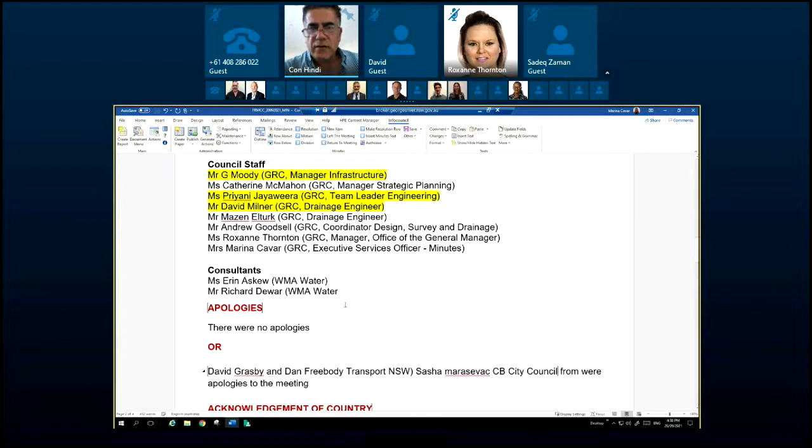Mr. David Milner? Yes, I'm present, and sorry, there was a late apology from Mr. Sasha Marasevac from Canterbury Council. Oh, Canterbury Council. It's not on that list, is it? Okay, we'll also accept that apology as well. Then we'll go to Mr. Mazen Elturk. Yes, I'm present here. Good, thank you. Mr. Andrew Goodsell. Yes, I'm present. Roxanne Thornton is present. Ms. Marina Cavar? She is present, Mr. Chair. She's taking the minutes today. Okay, good. Consultants, Ms. Erin Askew.

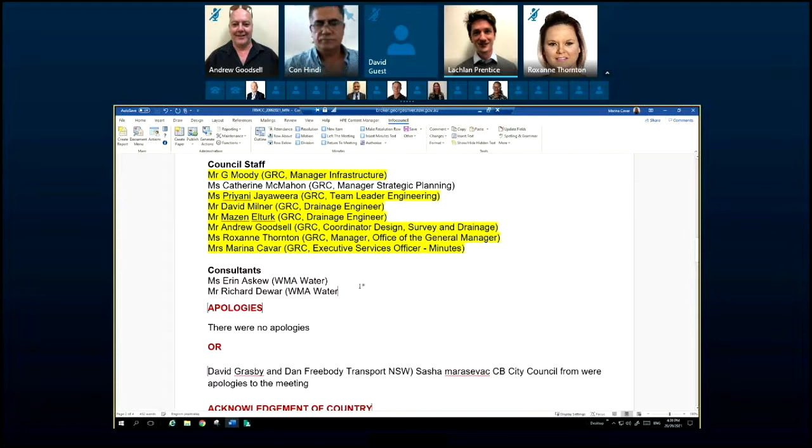I will mention too. Can everyone hear me? Yep. Hello, this is Mr. Lachlan Prentice, Senior Environment Officer, GRC staff. I'm also present. Okay. All right. Well, Erin is present, and Erin, we've just unmuted you.

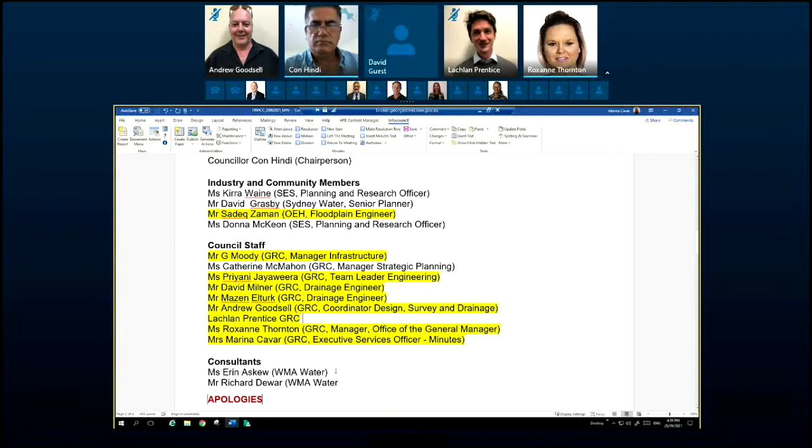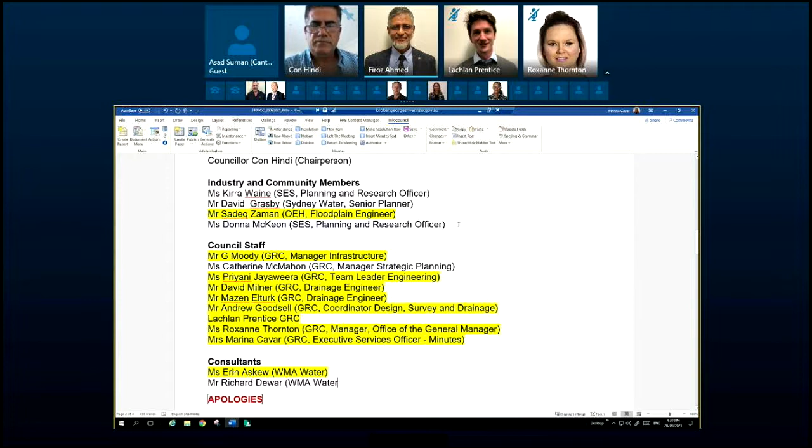Excuse me, Mr. Councillor. Yep. So this is Asad Suman from Canterbury Bankstown Council is also present. Good, thank you. Mr. Councillor, this is Firoz Ahmed, Senior Development Engineer from the Georges River Council. I'm also present. Thank you. And Beth Salt from Georges River Keeper is also present. Sorry, I was having audio issues before. Thank you. Can we have those names added if they're not there already?

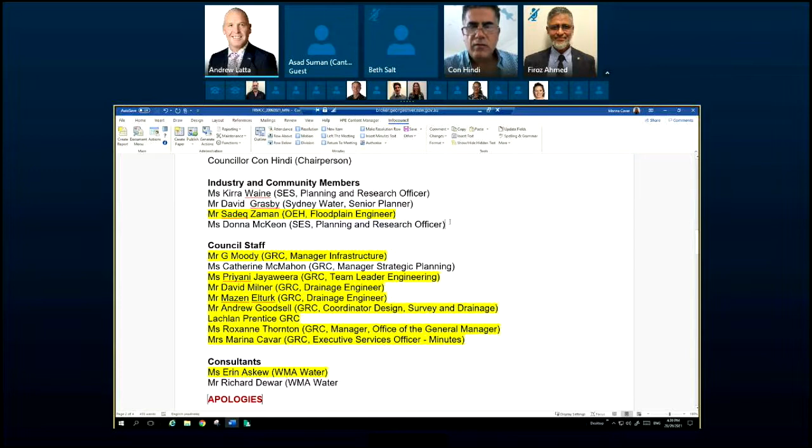And Councillor Hindi, Andrew Latta, Director of Assets and Infrastructure, is also present. Welcome, Andrew. Thank you. Okay. Do we have anybody? I note that we have a Peter Cinque. Okay. Pulak Saha. Where's that from? I'm not sure. Peter, are you able to say where you're from? New South Wales State Emergency Service. Thank you, Peter. Pulak Saha. I'm from Bayside Council. From Bayside, thank you, Pulak.

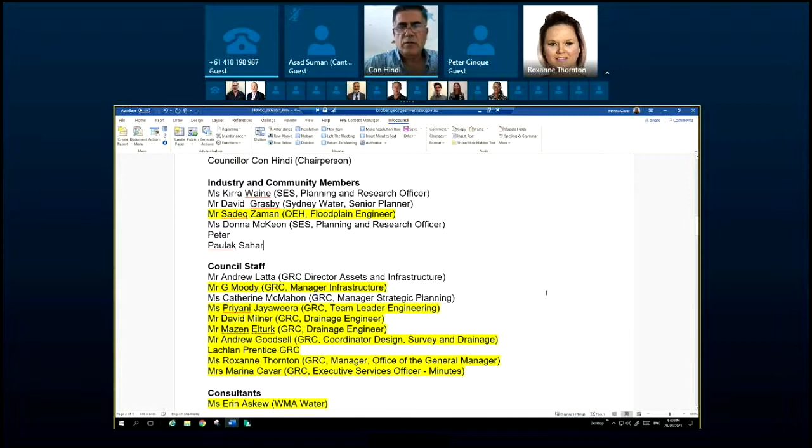Thank you. Richard Dewar, have we already said your name, Richard? Apologies. No. Richard Dewar, if you're able just to unmute yourself and let us know where you're from for today, just for the minutes. Yeah, I'm here. Thank you, Richard. And where are you from? WMA Water. WMA, thank you. Sarath Danton. Sarath, are you there? If we could just mark it down, minute taker, that there is a Sarath Danton also present, and we may just investigate as to where Sarath is from. Thank you.

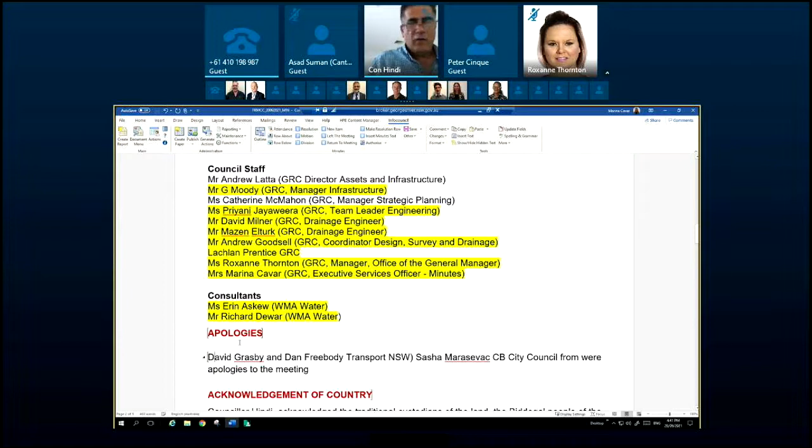Anybody else? Look, as people come along, we can add the names. I probably need Roxanne's help a bit when it comes to the moving and seconding to make sure that we get it right. But apart from that, welcome everyone to the meeting, and anybody else that joins us can unmute themselves and let us know. So we've discussed the apologies. We've got 3 apologies. We're now looking for a mover and a seconder, since we've got all the names. Who would like to move and would like to second?

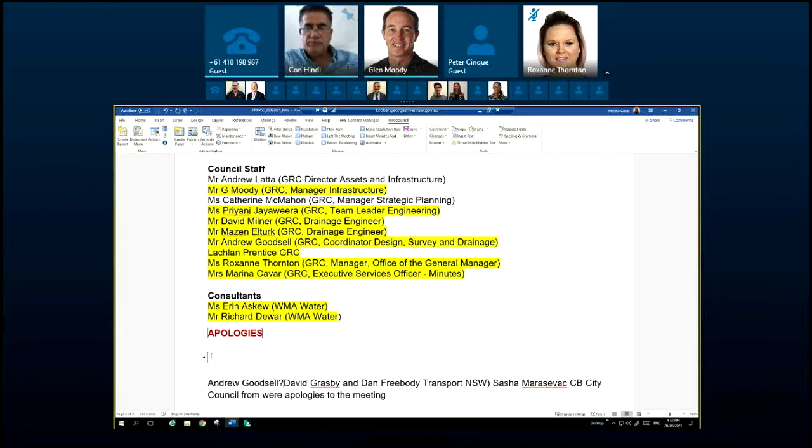Just for clarification there, Councillor Hindi. Yep. So for voting purposes under the terms of reference, the mover or seconder should be from yourself as the chair, the SES, which we've got Peter online, Office of Environment and Heritage, which we've got Sadeq online, or the community representative, which I believe is Aaron Sellers, but I'm not sure that we've confirmed that he's online. So you need a mover or a seconder from those groups. All right. I'm happy to move it. I'll move the apology, and we'll have Peter or Sadek to second.

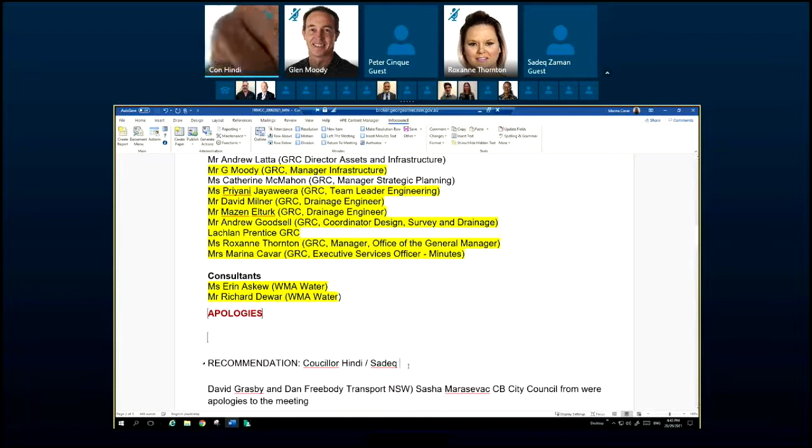Can't hear anyone. Yeah, I'm here, Councillor Hindi. Is that Sadeq? Yes, Sadeq Zaman. Okay, thank you. Moved by myself, seconded by Sadeq Zaman. All in favour, say aye. Against, declare that carried. Does anyone have any conflict of interest so we can have it recorded? Probably don't, but the only thing about conflict of interest here is some people live in that area where we're talking about the floodplain risk management, and some of them don't know whether their property is going to be impacted or not. But at this stage, we're saying no one's got a conflict.

All right, there are no speakers registered to speak at the meeting. Now we move on to confirmation of the previous minutes of the Floodplain Risk Management Committee meeting held on the 2nd of November 2020. Can I have a mover to move the adoption of the minutes, please? I'll move the adoption, but I wasn't at the meeting. Do we have a seconder? Yeah, I can second. I was in the meeting, Sadeq Zaman. Okay, that's good. So moved by Councillor Hindi, seconded by Sadeq Zaman.

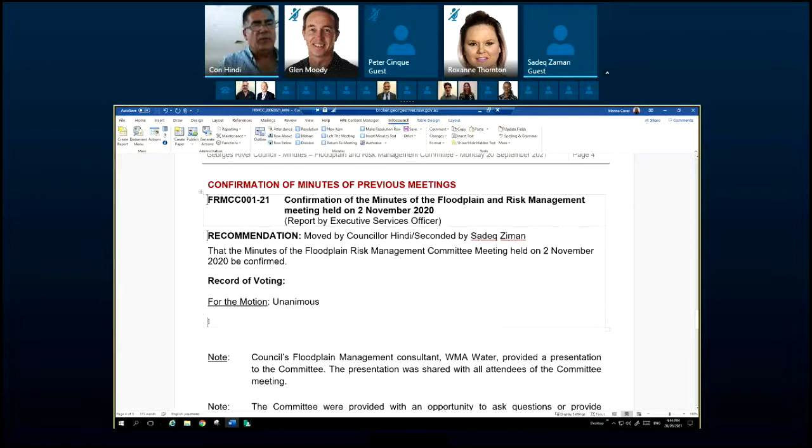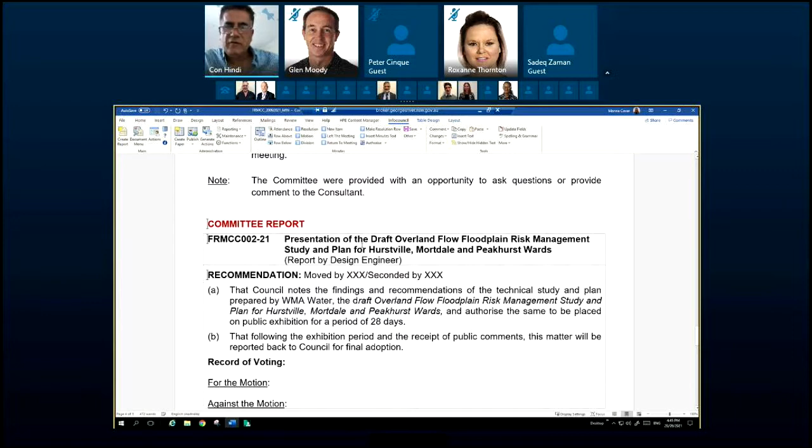Is there any discussion, omission, or alterations? If there's none, all in favour, say aye. Against, declare that carried. Let's move on to the only item on the agenda, FRMCC002-21, presentation of the draft Overland Flow floodplain risk management study and plan for Hurstville, Mortdale and Peakhurst. Who's the speaker on that one today? David Milner, who's presenting? That will be Erin Askew from WMA. Okay, good. So can I hand it over to Erin Askew to start the presentation?

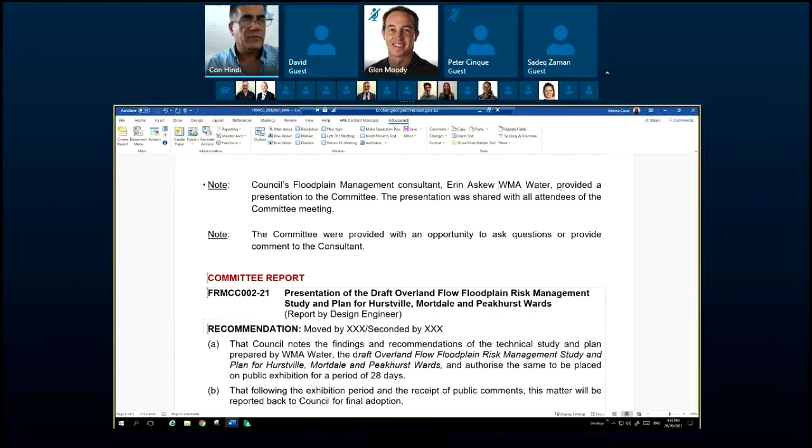Aaron? I'm just flicking back to our agenda, which is the main one. Let's see the presentation. Hello, Roxanne, do we have Aaron there? I believe so. Let me just see if I can manually unmute. Is it Erin Sellers that we're wanting to unmute, Councillor Hindi? No, I thought Erin Askew. Erin Askew, thank you. I've just unmuted Erin Askew. Aaron, are you there? He's on mobile. Okay, we've got one mobile that seems to be unmuted. Someone's just advised that Erin Askew is on mobile.

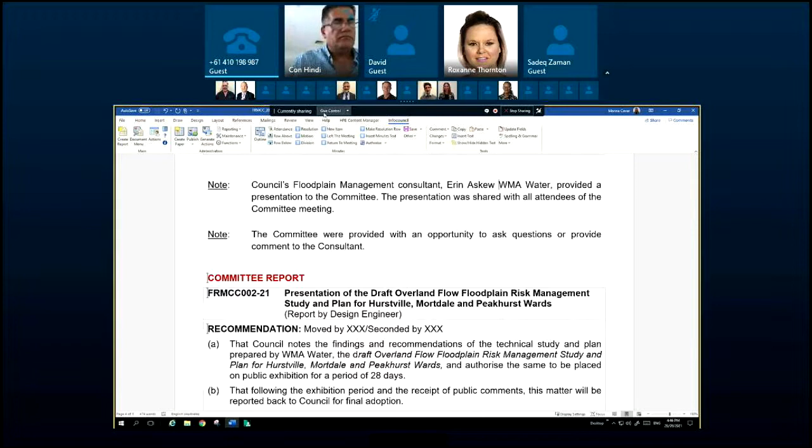Hello, are you able to hear me now? We can, yes, thank you. Okay, wonderful. I'll also need to share my screen. It currently says that screen sharing is disabled. And do you need that being shared from your mobile connection or from the one that actually has your name? From the one that has my name. No worry, that's easy to do. I'll just make you a presenter now. Okay, thanks. And Aaron, that should allow you to share now. Okay, wonderful. Thank you, Aaron. Over to you, and thank you, Roxanne, for your help there. Is that working for you, Aaron? Yeah, I'm just trying to select the program. Oh, no worries at all. Okay, are you able to see that, everybody? Yes, thank you. Wonderful.

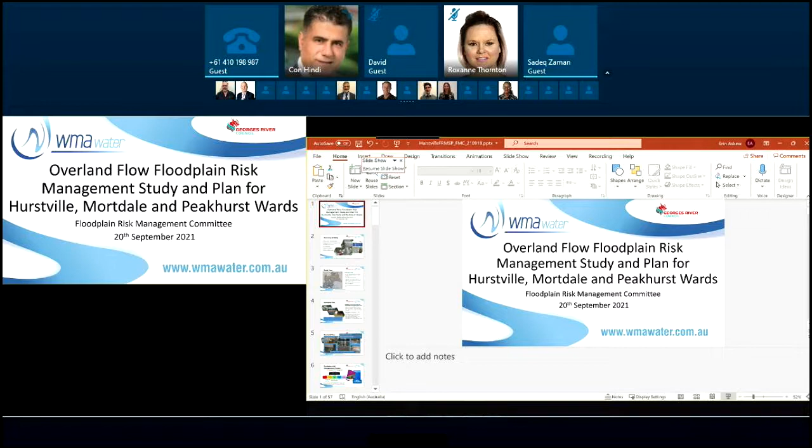Okay. So today we're just going to talk through the Overland Flow floodplain risk management study for the Hurstville, Mortdale and Peakhurst wards. So these sections of the LGA were part of the former Hurstville LGA, and the flood study for those areas was done a few years ago, and so this management study is just following on from those. It makes for quite a long title, but anyway.

So today I'm just going to give a bit of a recap of Overland Flow and what we mean by Overland Flow, a background to the floodplain risk management process, our approach to the study and the recommendations that are coming out of the study, and where to from here. As I just mentioned, it's the Hurstville, Mortdale and Peakhurst wards of the Georges River LGA, but these were part of the former Hurstville local government area. And so as part of this study, we're looking at what's called overland flow. Now, overland flow is generally when the rain falls on the catchment and runs off to the natural or constructed drainage systems. So it's distinctly different from Georges River flooding, for example.

Overland flow is typically a very shallow depth. And there doesn't tend to be great scale in the types of events. So when we talk about a 5% annual exceedance probability compared to a 1% annual exceedance probability, the scale between those is not significant. So typically, the flooding sort of scales over about 0.5 metre, whereas if we were talking about Georges River flooding, the scale between those events would be metres. And that's just a function of the type of flood behaviour it is. But what this means is that areas that are inundated, not a whole lot of extra areas come in as we get through larger events.

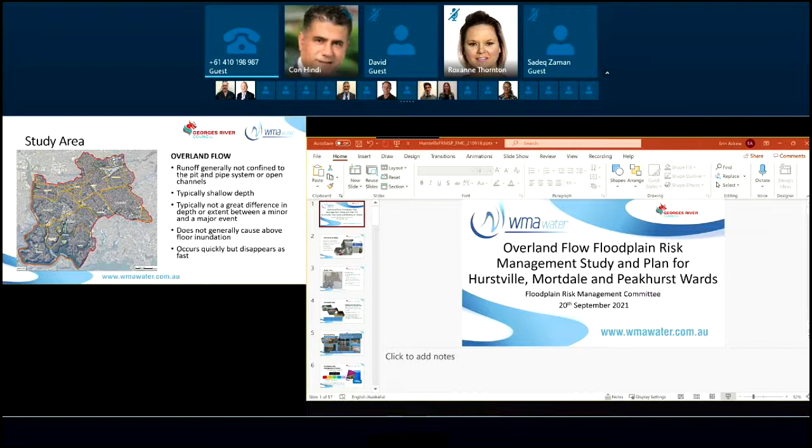Some challenges that we have when we talk about overland flow, because it's really this small scale inundation resulting from a rainfall event, we have challenges with the community often that the term flood means different things to different people. So when I talk about a flood, lots of people think I'm talking about the Georges River flooding, but instead we're talking about these very localised events. Communities often have not a lot of tolerance for flow not fitting in pipes.

And so the stormwater network typically is designed for about a 5-year flood event, which is a very small flood event compared to that 1% AEP, which is a 100-year flood event. So it's a very challenging type of flooding to communicate with the community, because the community often expects there to be no water anywhere anytime it rains. But that tends not to be the case, because, like I just mentioned, the stormwater system, nowhere in Sydney or Australia, for that matter, would have a capacity larger than about a 5-year.

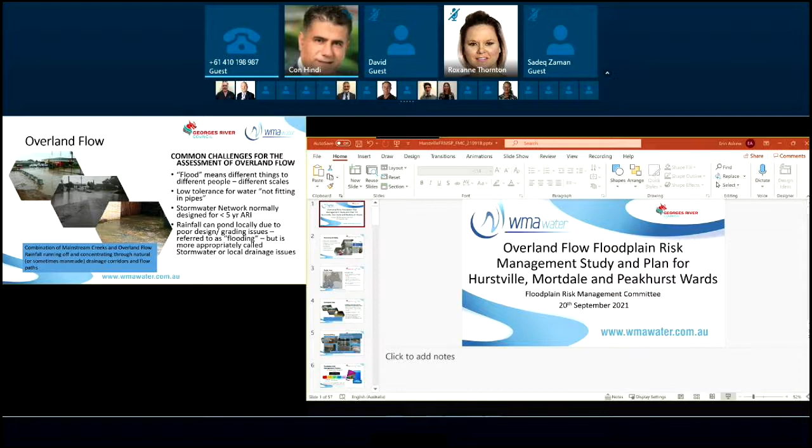So some of the recommendations don't necessarily provide a solution to that as part of this report, but provide a pathway forward for council to do a little bit more localised investigation at those places. I just wanted to cover that off because sometimes it's...

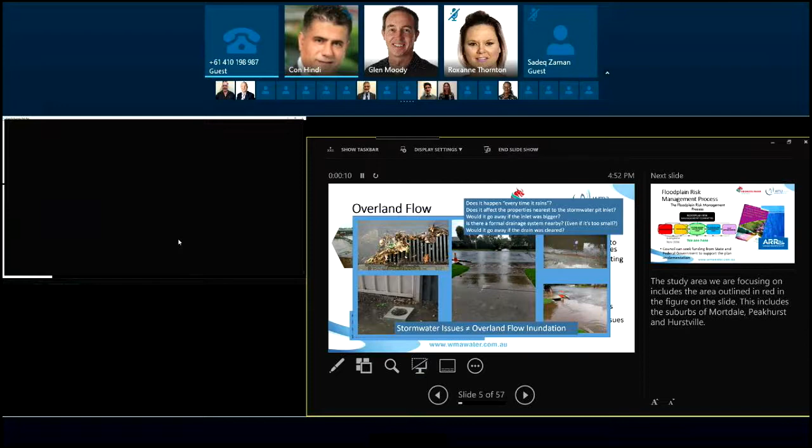Glen Moody. Hey, Glen. Hi, Erin. Sorry, we're getting some comments through. We're just having some difficulties viewing the presentation. It's appearing twice on the screen. If you could just try and maximise the presentation image. Okay. So on my screen, it's the full screen. Let me just try and share something else. Is that a full screen now? That is better now. It's better, but it's showing the next slide. Oh, okay. So it is slightly better. Sorry, this is IT. Are you running it on 2 screens or just on 1 screen? Yeah, I've got 2 screens. Try and see if you can share the screen that's actually showing the slide presentation.

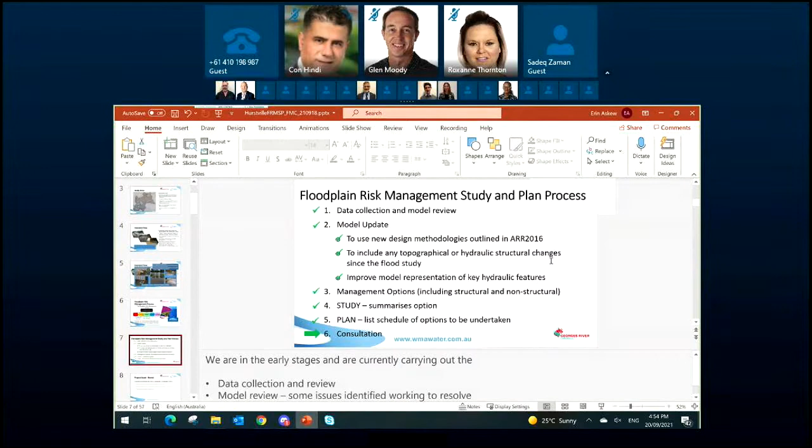So when I go share screen, there's no option. How do I change the option? Is the presentation being shown on your primary desktop or on your secondary screen? Hang on, just a second, I'll move it. Sorry, how do I make it share not my primary screen? I think the best thing you can do is just increase the size of your slide that's on the screen right now, rather than trying to go full screen. Okay, just the presentation. Yeah, just make it larger so that people can see it better. Okay.

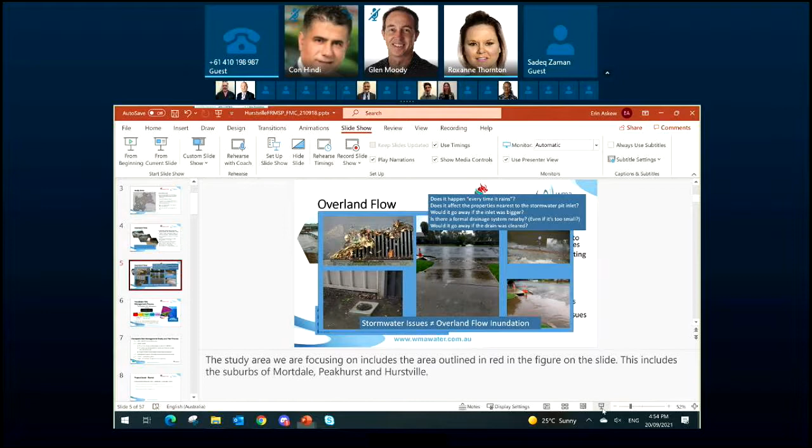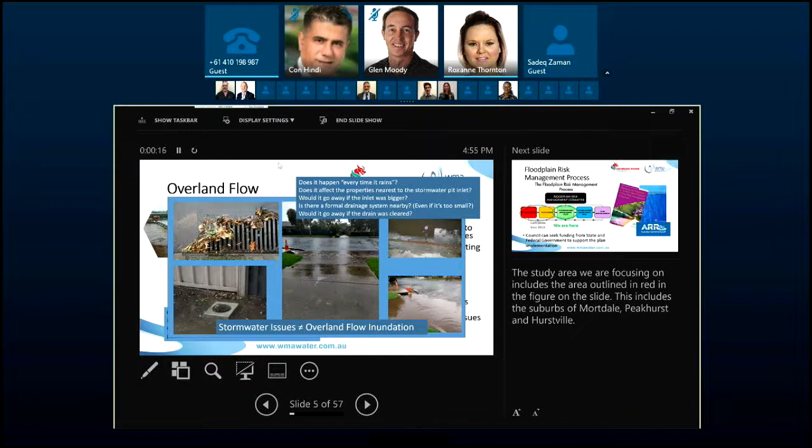Erin, if you see on the bottom side of your presentation, there's a full mode. Maybe if you click that one. Yeah, so that's what I'm running, but that's not on my primary screen, and so I don't know how to share the non-primary screen. This is Roxanne speaking. Hi, Erin. I'm just going to try something else. If you can go to that screen there, and then see the grey options under, there's that one. Up the top, see display settings? Yeah. Okay, and then try swap. There, can you see it now? Yes, we can. Okay, wonderful. We're away. Thank you.

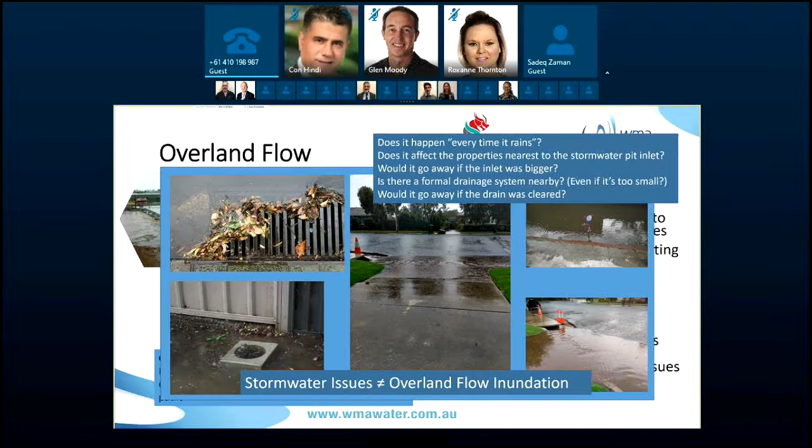Excellent. Okay, so the next thing I wanted to run through was just a quick overview of the floodplain risk management process. So this is stipulated as part of the New South Wales government's flood-prone land policy. And there are a few documents that support that process, which is the New South Wales Floodplain Development Manual. And there are also some things in the Australian Disaster Resilience Handbook Collection, Handbook 7, that the New South Wales Department of Planning, Industry and Environment have drawn into the New South Wales Floodplain Risk Management process.

And essentially what this means is there's a framework which councils move through, and it allows for the assessment of flood behaviour in addition to the identification of mitigation options. And the really key aspect of it is that the council is able to access funding throughout the whole process. So including the technical investigations that are done, but most importantly through the concept design and implementation of the recommendations out of the plan.

So a number of the options that are recommended out of this floodplain risk management study, council will be able to seek grant funding from the state to help to implement those. And so we're right in the middle there. It's really the green and blue stages that we're currently doing, and the recommendations will be that final purple stage.

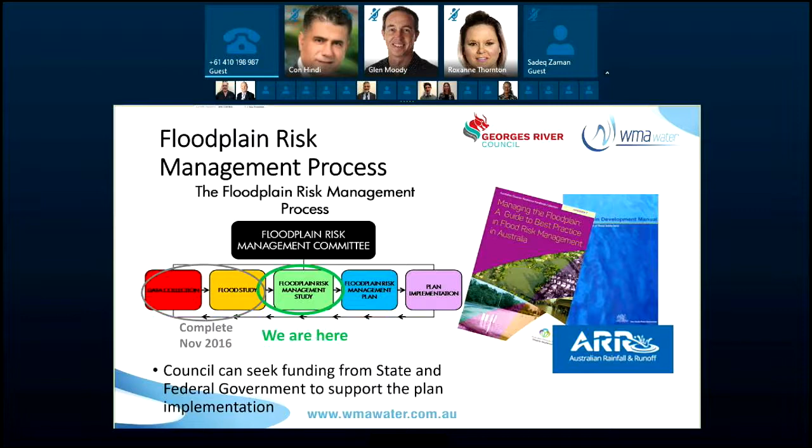And so while we're undertaking the study under that framework, these are the key steps that we've done. So there was a data collection and model review. Like I mentioned, the flood study was done a few years ago, I think it was 2016. And so there's been some changes to the catchment, as well as some significant changes to the methodologies that we apply. We refer to it as AR&R 2016 or AR&R 2019; there was an update to it done in 2019. And so those methodologies have been applied to the representation of flood behaviour in this catchment.

And that really future-proofs the flood behaviour representation that council uses, at least for the foreseeable future. The last significant update of AR&R was done in 1987, so it's been a long time since an update was done. And so we've updated the modelling and re-established the design flood behaviour. And then through a process with council staff and engagement with the community, we've identified a series of hotspot locations where there's flooding issues, and identified strategies that could be applied at those locations to help mitigate the flood risk.

And so the study, which is the document that everybody's had access to as part of the agenda for this meeting, really outlines the assessment that we've done. And there's a table in there which we call the plan, and that is the recommendations. And the next stage is consultation, but I'll talk about that at the end of my presentation.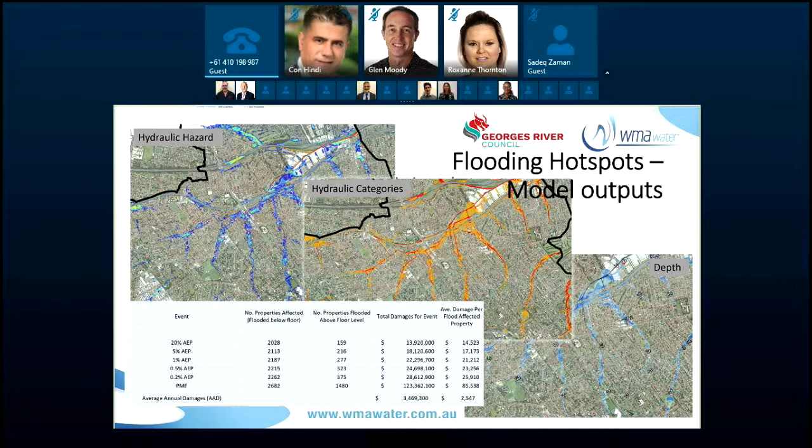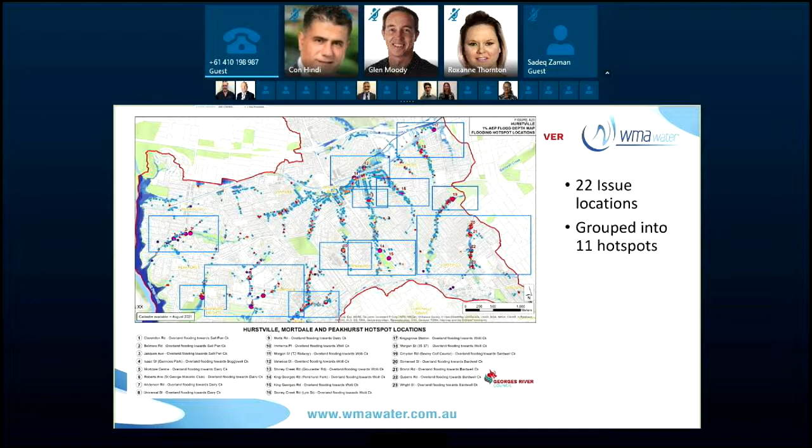So for this study area, there was 22 locations that were identified as having a flooding issue. So this might have been something that's reported or we identified as part of the study. And we grouped those into 11 hotspots, because what we found was they were sort of all along the same system, so they really were part of the same location. So any strategy that we can implement there really needs to be an overall strategy that works for that entire section of the system. So our next step was to identify and assess flood risk management options.

These tend to fall into 3 different categories: flood modification measures, response modification measures, and property modification measures. The first lot that I'm going to talk about are the flood modification measures. And so these are structural works that we can put into the floodplain that physically alter the flood behaviour. These are the ones that we can use the hydraulic model to test. And I've just got a bit of an overview here, because we don't just look at how they impact on flood behaviour.

We also have to consider what's the benefits that we get for the cost, so their economic merit, and how hard they are to implement. Is there the ability for council to stage some of these to help spread the cost over a few financial years? We also look at impacts on the social elements. So do these options make the situation for emergency services better? Do they improve access? Do they impact or improve the flood behaviour for vulnerable facilities? Hazard awareness, disruptions, and support through the community is something that we'll get from our consultation stage. We also look at environmental, which just looks at flora and fauna and heritage impacts.

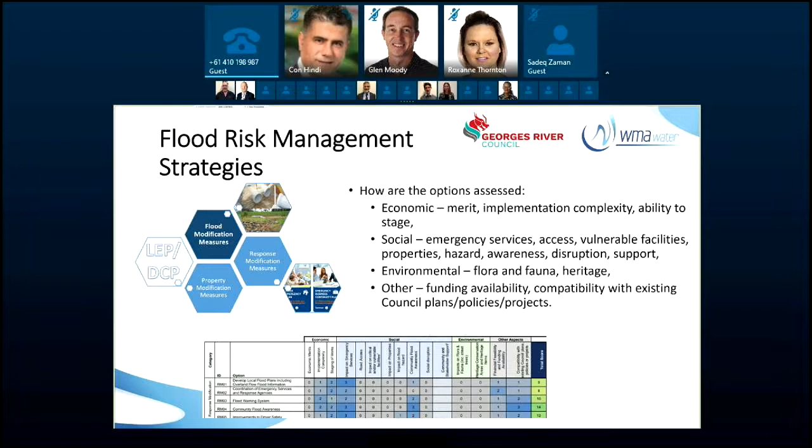Okay, so in total, we assessed 14 separate structural options, and so they included a number of elements. Through our assessment process and discussion with council, we found that 9 of those were really quite viable and have some related recommendation as part of this floodplain risk management study. But there were 5 that we found really didn't work, and so we've discounted those. I'll just run through those ones that we've discounted quite quickly so that the committee can see what we've looked at and why it didn't work. And then I'll run through the ones that are recommended.

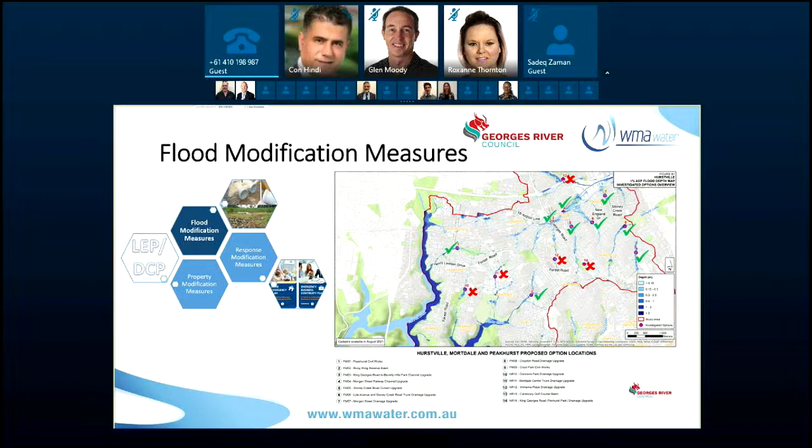So one of the ones that we found didn't really work was the Gannons Park trunk drainage upgrade. So for this one, we noticed further up in the system there were some constraints on the drainage system. So we wondered whether if we substantially increase the capacity of the system through Gannons Park, because obviously it's not under dwellings or anything like that, so it's quite easily accessible, whether we could get improvements through the system further up. What we found is that it really had a localized benefit. So it didn't achieve the outcome that we were trying to get from it, and so therefore this option was discounted.

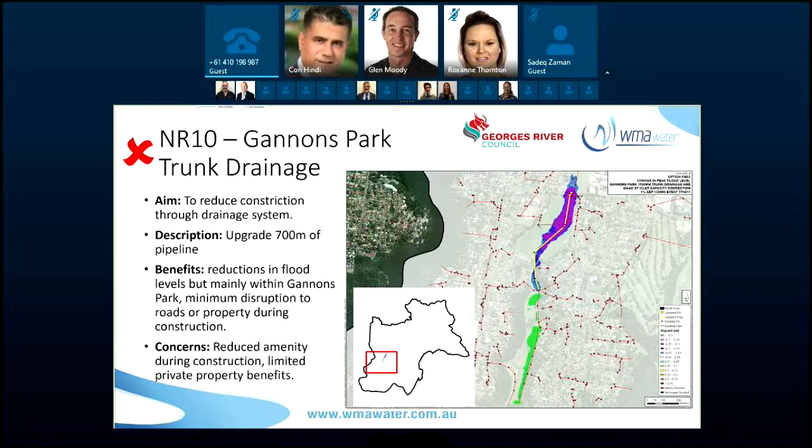In a similar vein, we looked at what we referred to as the Mortdale trunk drainage upgrade. This was to try and reduce the impacts through that Mortdale industrial area. In a similar way, it really had a localized impact, and it wasn't significant enough for it to be made a recommendation. It's only reducing flood levels by about 50 millimetres. So for the cost and the inconvenience of having to upgrade this system, it doesn't have a broad enough benefit to be justified.

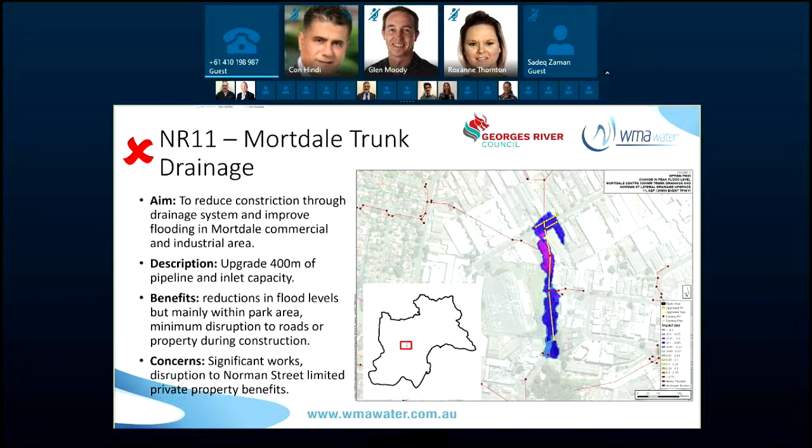The next one we had a look at was called Immarna Place local drainage. We noticed here that the water really wasn't getting into the open drainage channel, so we looked at trying to increase the culvert capacity and the inlet capacity to get that water off the roadway. Again, we found that the works that we modelled just weren't able to remove that water. So again, this one was discounted.

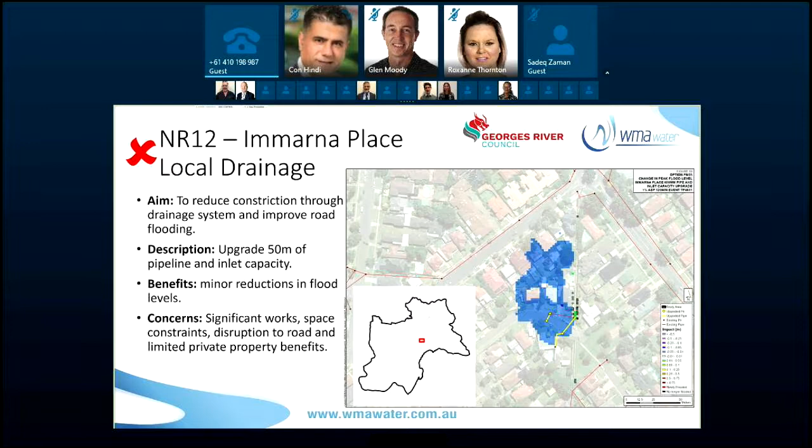The next one was looking at an opportunity in the adjacent local government area, so in the Canterbury Golf Course. A detention basin temporarily stores water, allows the peak of the flood to pass through the rest of the system, and then allows the water to be released slower. We wondered whether one in the Canterbury Golf Course would be an opportunity to help improve the flood behaviour. What we found is that the benefits were really quite localised. What we wanted to see was really some benefits through this system, passing under Beverly Hills train station there. We weren't able to see that with this basin. So again, this one was discounted.

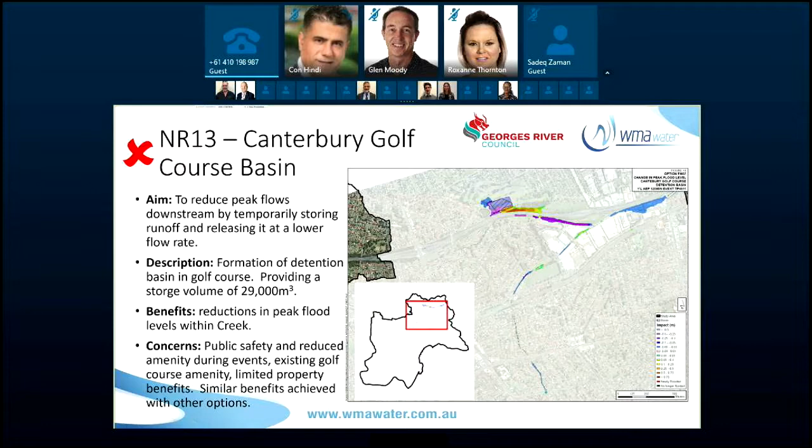The next one that we looked at was a drainage upgrade along King George's Road. Again, it was found to be quite ineffective for the surrounding catchment areas. So again, discounted. So that's been some really negative news. Now I'll move on to the options that are recommended. There's quite a few here which are quite good and have been recommended for future works or assessments.

So the Peakhurst Park detention basin is the first one. This one actually really benefits the entire system, so downstream of Peakhurst Park, down through Clarendon Road, right down through the system. I believe in this one the benefits occur all the way down to Henry Lawson Drive. Like the basin I just described before, this basin would temporarily store the water, allowing the rest of the system some space. Additionally, Hedley Street, just adjacent, has some flooding. By installing a small bund, it helps to keep the flooding off that road as well.

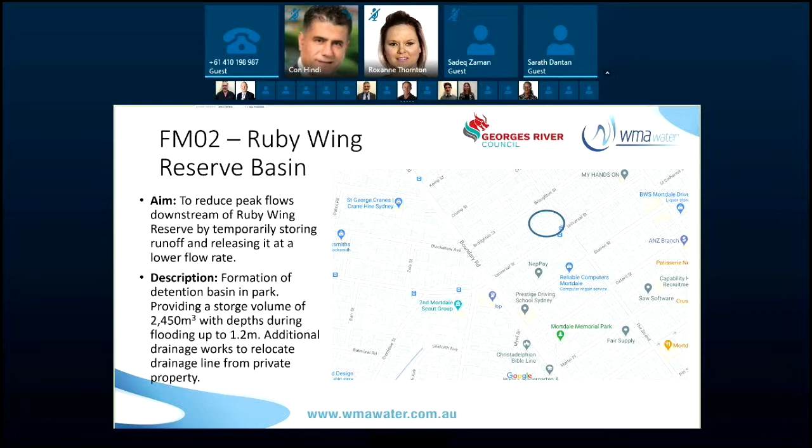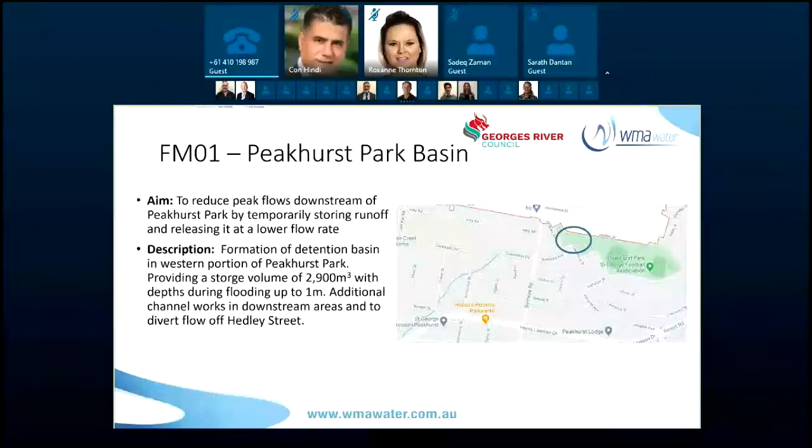Oh, sorry, something I should mention, but just back on Peakhurst Park, the recommendation is to undertake a feasibility study and develop a concept design. One of the requirements of the Department of Planning, Industry and Environment is if the capital works expenditure for a project is greater than $500,000, the option needs to go through a feasibility and concept design study. So that's what the recommendation is out of this study, but that's something that council can still seek funding to support that investigation, and it just moves it further along towards the ability to be able to construct.

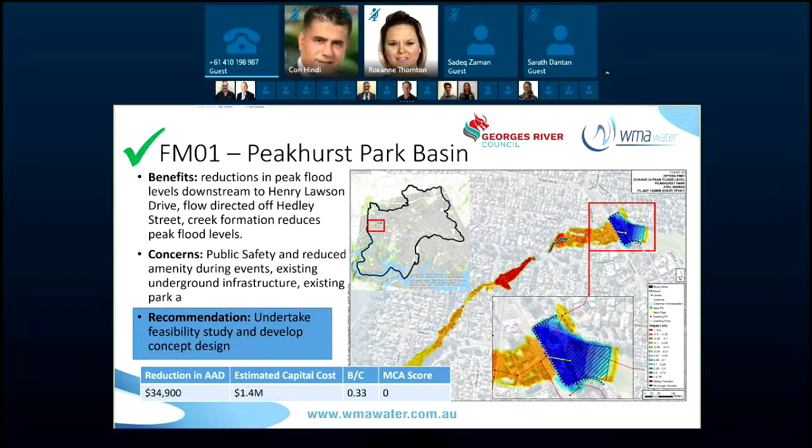And so the recommendation is the same for this Ruby Wing detention basin, because the estimated cost is around $2.5 million, and so we get a slightly lower BC, but the multi-criteria score is slightly higher. So as you can see, that multi-criteria score is really not just about the flooding benefits and the cost. It includes a range of issues.

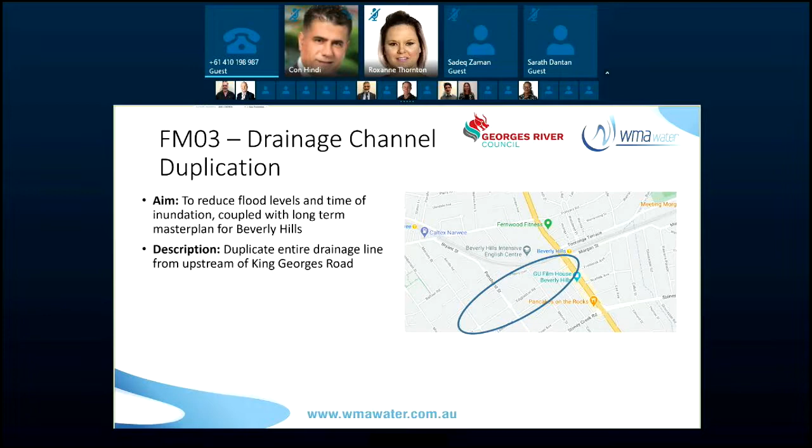So the next one is what we've called the drainage channel duplication. So this really extends right through the Beverly Hills area. There's an open drainage line that crosses under King George's Road and moves down towards just past Beverly Hills Railway Station. Now, we looked at broad scale duplication, so increasing the size of this drainage line, and as we've modelled it, it really probably isn't feasible.

But the idea behind this option is to identify for council that through the master planning that's occurring in Beverly Hills, there may be opportunities to increase the channel capacity where possible that will allow some benefits to occur. And so you can see by broad scale widening the channel, we get some quite large reductions in flood levels through this area. But there are also some increases downstream. But the recommendation is looking at this drainage channel as part of the Beverly Hills Master Plan and considering upgrade opportunities; that's really where this option is going.

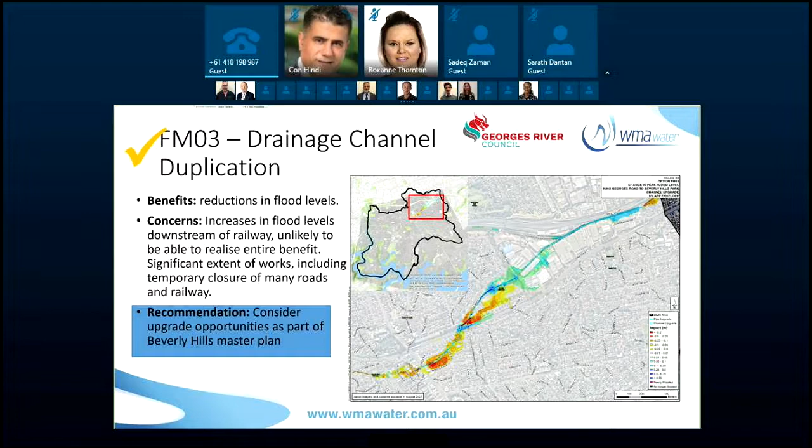Okay, so the next one, this is sort of at the downstream end of that option that I just talked about, the railway culvert under Morgan Street. So there's a lot of reports of inundation at the junction of these two channels on Morgan Street and inundation up Gloucester Road. And so initially we thought that this was being caused by the railway culverts.

What we found was that it gave us a small benefit in the upstream system when we increased these culverts by allowing the flow to get through, but we also didn't really improve the situation at Morgan Street. And so in terms of a recommendation, I suppose the other point I should point out is that changing culverts under railway lines is incredibly costly, incredibly difficult to do because the railway lines have to be shut for the works to be done.

So really the recommendation for this one is that the benefits are identified to Transport for New South Wales, so that if there's ever some proposed works at these two culverts, consideration of increasing their capacity is undertaken. It's really important for it to be documented in a plan like this, just so that it can be referred to if something happens with one of the other stakeholders that are involved.

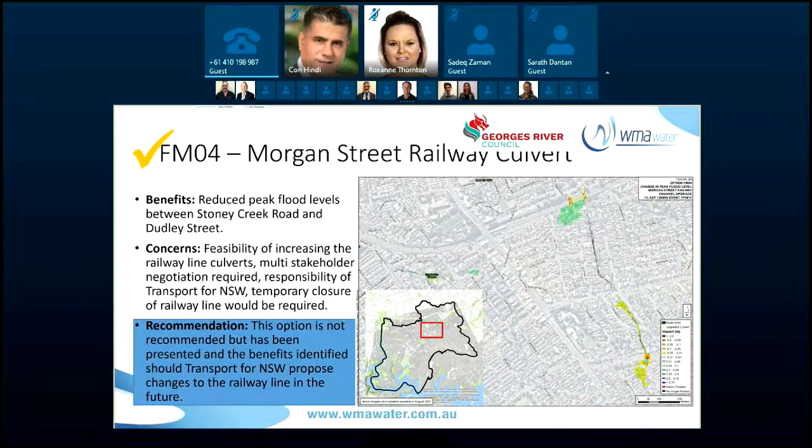Aaron. Yes. This is Sarath Dantan from GRC. In terms of increasing the capacity of the culvert and also upgrading the channel, this has got an implication on the downstream side of it in terms of flood level increase, property inundation, that kind of thing. So while considering this kind of investigative option, we should always be mindful of what sort of impact is happening in the downstream areas, maybe in our area or in the adjoining areas.

So I'm sorry, I didn't. I'm finding it really hard to hear you. Sorry, what was the question?

Yes. In terms of upgrading the culvert and also upgrading the channel to double the capacity, there could be a severe implication in terms of the downstream impact on flooding, because we are increasing the area and pushing more flow downstream. So these things need to be looked at quite critically in terms of the benefit and the adverse impact on the downstream environment. I've got experience in the City of Parramatta. We increased the channel and the culvert sizes at the bridge, done by the trust, and it had an enormous impact on the Fitzwilliam confluence area. The flooding was of greater extent.

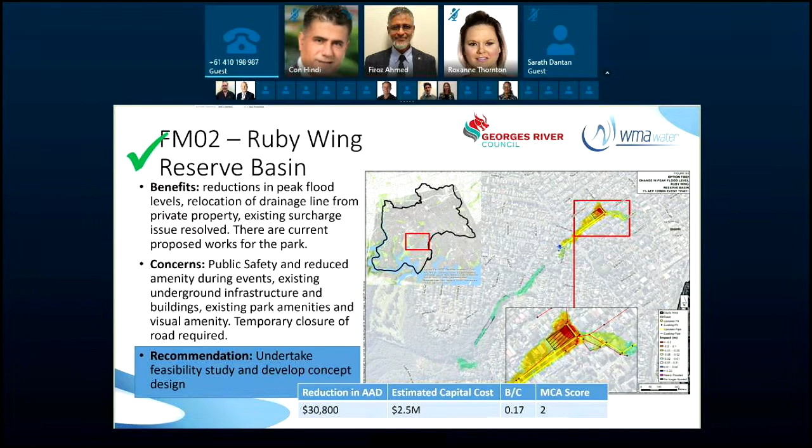Yeah. So if either the drainage channel or the culvert upgrade were standalone options, in my opinion, they wouldn't be recommended. But I suppose the recommendation is that these two items are to be considered when other things are occurring. So when the Beverly Hills Master Plan is more developed, I imagine there would be some flood investigation undertaken, and it would help to minimise those offsetting impacts.

The options are really just to identify that maybe something could be done here, but it's part of some other scope of work, and definitely those negative impacts are discussed as part of the report.

No, that's okay. Thank you. Yeah. Okay. No worries. Okay.

So the next one is what we've called the Stoney Creek Road upgrade. This one actually achieves really, really great benefits. What we found at Stoney Creek Road was that once the water comes out of the open channel, it doesn't go back into the channel. It actually floods down Gloucester Road. So this is one of the significant causes of inundation down that road.

And we found by increasing the culvert capacity, as well as installing a small bund to stop that overflow down Gloucester Road, we were able to have really large reductions in flood levels. And noting there are some increases in this area, but we're talking 50 mils, whereas we're getting up to 250 mils benefit through Gloucester Road.

So as part of the concept design and feasibility study, the balance of this positive and negative impact could probably be improved. But in terms of an option for reducing the inconvenience of the inundation on Gloucester Road, it's looking really positive. So like I said, the recommendation is to undertake a feasibility study and develop a concept design in consultation with Transport for New South Wales, because they would be the owner of the culvert on Stoney Creek Road.

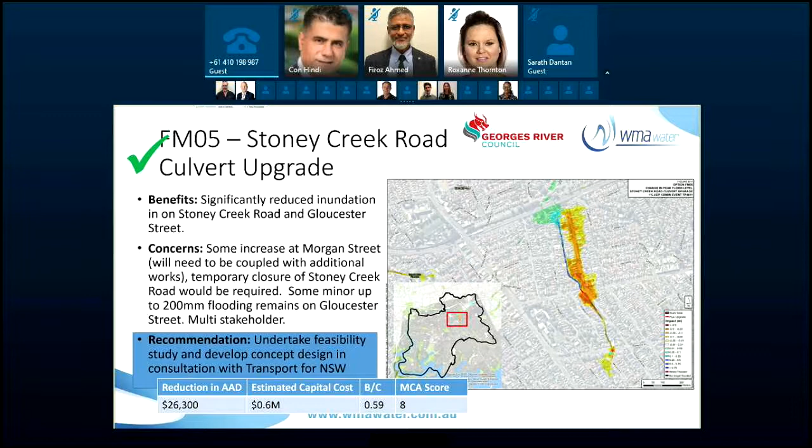This one we get a cost-benefit ratio of 0.6 or 0.59, so it's a much greater improvement than the other ones that we've looked at previously, and we get a multi-criteria score of 8. So this one is really looking like a pretty good option.

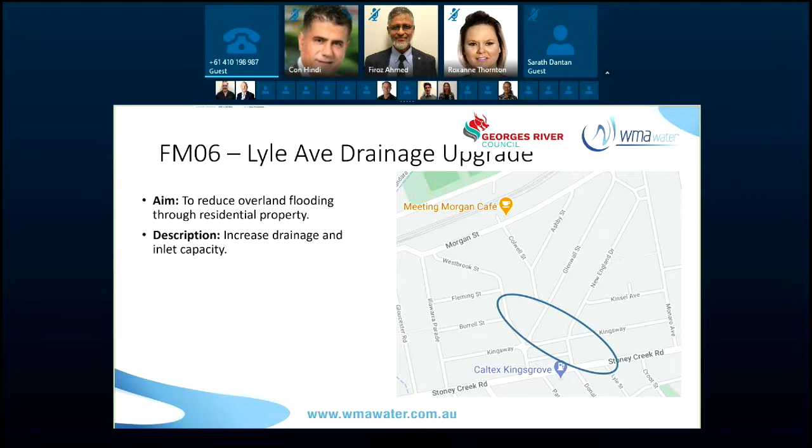The next one we've called Lyle Avenue Drainage Upgrade. And so it's through this flow path that comes down Lyle Avenue, crosses over Stoney Creek Road and moves through the residential areas. We looked at increasing the culverts through this area. Now, some challenges with this option are that some of the drainage infrastructure is located in residents' private yards, often under dwellings and things like that.

But what we found by just a small increase in the drainage capacity, we were able to get some reductions in flood levels. So the recommendation for this one is that we undertake increases to the drainage capacity as the opportunity arises with redevelopment. So again, this is one of those ones where we're really documenting it and getting it in a plan so that as that redevelopment through that area occurs, these opportunities aren't missed to help have benefits to the flood behaviour. And again, the multi-criteria score for this one is -1, and that's probably really reflective of the fact that it's technically challenging to implement.

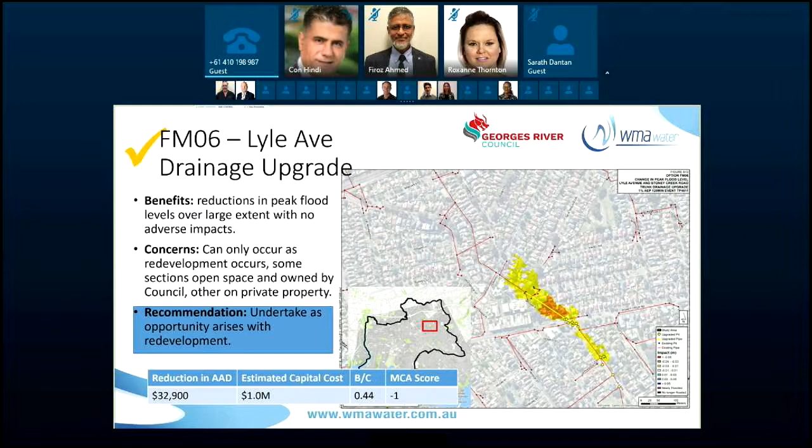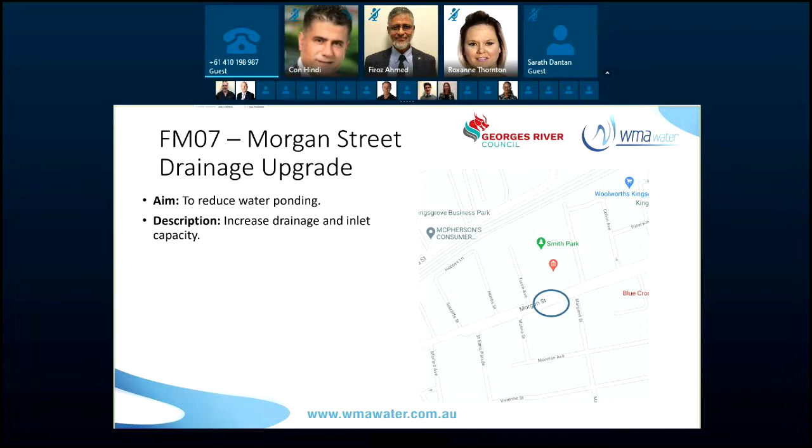So this one is also called the Morgan Street Drainage Upgrade, but this site is located more towards Kingsgrove Railway Station, as opposed to the Morgan Street option at Beverly Hills. So this one came about as a report from a community member that there's a lot of water always ponding outside their residence. So this one was really quite challenging for us. We looked at a range of options to help improve the flood behaviour here. But what we found was that even having a huge increase in the drainage infrastructure or having a huge increase in the ability for water to get into that drainage infrastructure, we weren't able to completely remove the small inundation that occurs on the road.

And our model shows that the pipes within this area actually still have capacity. So this is one of those ones that I was talking about earlier that maybe is bordering on that stormwater issue. There's actually a raised median strip or garden bed within the roadway here. And potentially this is what is adding to the impacts of that ponding occurring. So for this one, the recommendation is to undertake a more refined scale assessment. Obviously our models are representing the whole entire catchment. You could actually do a much more detailed assessment by refining the model in this localised area. And it may be that just some minor reshaping could potentially achieve a positive outcome. So that's what the recommendation is for that one.

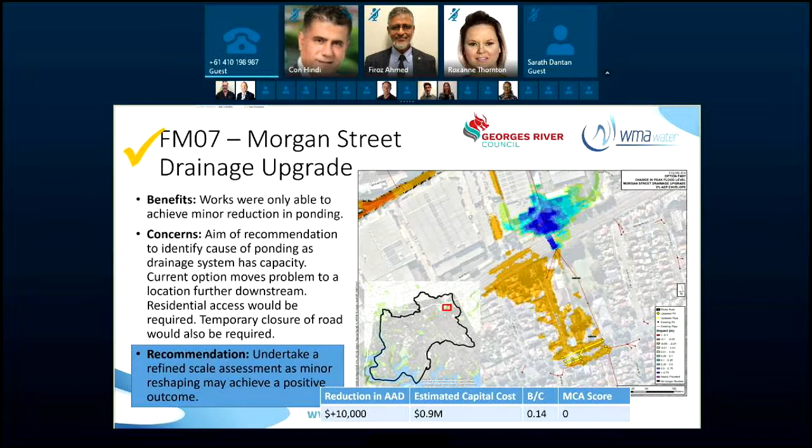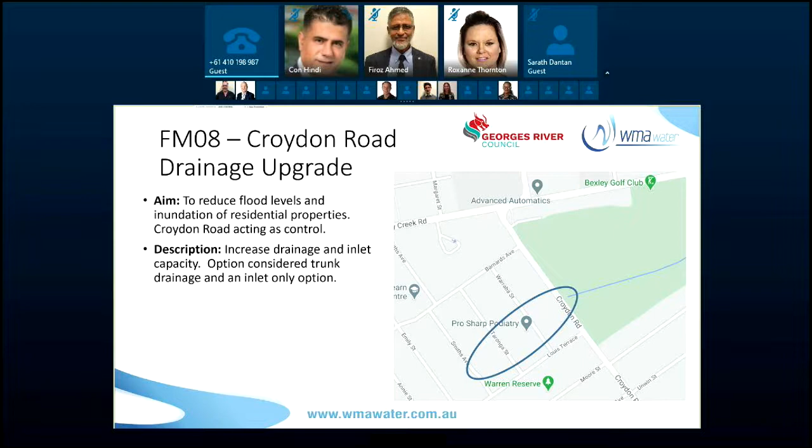So the next one is the Croydon Road Drainage Upgrade. I might show the flood map here. This is an area right at the edge of the study area, actually. This side of Croydon Road is actually the adjacent council area. But there's a location where the properties here are quite severely impacted by flooding. Water tends to build up before it overtops Croydon Road. So we looked at a range of things, including increasing the culvert capacity and inlet capacity right at Croydon Road here, and as well through the entire system.

Now, this one has the same challenges as the Lyle Avenue option in that the drainage system essentially runs under properties. So this one, we looked at two scenarios. We looked at one where we had the opportunity to upgrade the drainage line, but then we looked at another scenario where we just increased the inlet capacity, so allowed more water to get into the system, to see whether that could improve things. And we found that they actually had quite a significant amount of benefit. So the recommendation is to undertake a further feasibility study, but it's really about, as the opportunity presents itself through redevelopment, increase the pipes, and when the opportunity presents itself, increase the inlet capacity. So that's when roadworks and things like that are occurring. And this one we end up with a BC of around 0.25, but a multi-criteria score of 1. So on the weight of positive and negative, this one just sits on the side of positive.

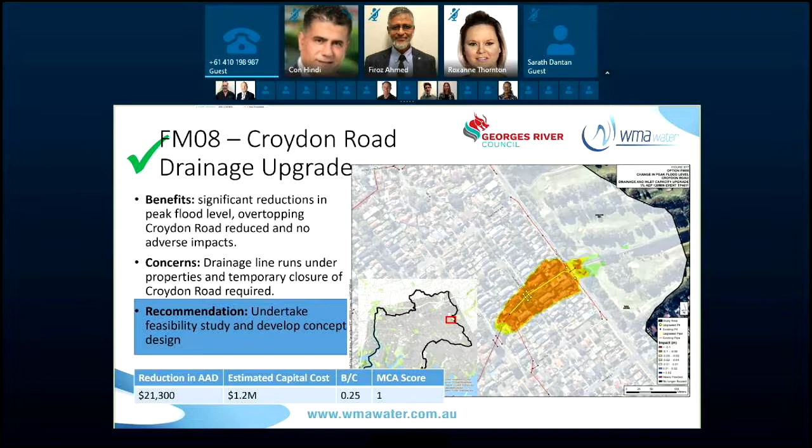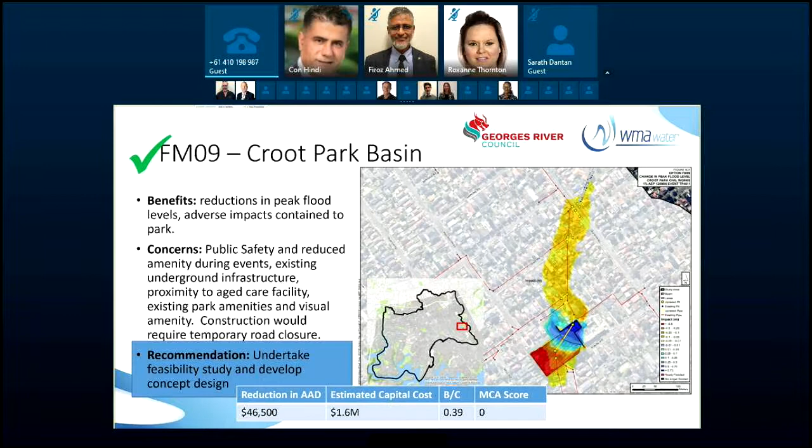Okay, so there are all the structural mitigation options. And so the report then goes on to talk about response modifications and property modifications. Sorry, excuse me. In terms of the response modifications, because this is an overland flow catchment, the flood behaviour is typically quite short duration, as well as shallow inundation.

So we don't have the ability to recommend things like large-scale flood warning systems to allow people to evacuate, because the reality is the warning time between the rainfall and the flooding doesn't allow for that type of response to occur. So within these catchments, it's really about educating the community to understand what the flooding means, trying to build awareness about the dangers of driving through floodwaters and, sorry, just lost my train of thought there, and how to read the indicators.

So there is a flood warning recommendation, but it's really related to listening to the Bureau of Meteorology severe weather warnings and understanding what those mean. So I'll just run through them quickly. Develop a local flood plan, including overland flow flood information.

Now, this is a document that is jointly authored by the SES, and the local flood plans outline where there might be flooding hotspots, where response or recovery measures might be needed during and following the flood event. So the study has produced a large amount of this high resolution mapping, and that information can be really useful to include in these local flood plans.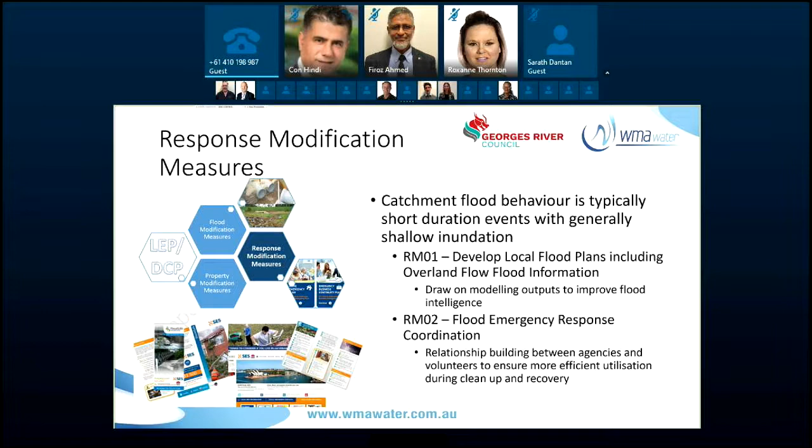And so this is a really great recommendation just during non-flood times for those agencies to be engaging with each other and talking to each other about who's responsible for what. And that also helps with the community education so that the community understands who's responsible for which element during the flood response and recovery.

Like I mentioned, we do have this flood warning recommendation, but it's about using those Bureau of Meteorology severe weather warnings to help the community to understand what they mean. And in-house, council can use the outputs from the flood mapping to try and determine, if we know that there's going to be 200 millimetres of rain, what does that mean in terms of a flood map? And very quickly can look at one of the maps that we've produced and understand where those response measures need to occur.

I've talked a lot about community education, so that's one of the key recommendations. The SES has a whole lot of great information on their website, a whole lot of pre-prepared brochures. So it's really just using that information to make sure the community really understands what happens when it floods in this catchment, who can I call if I need help, who's responsible for the road closures, all of that type of thing. And the final one is improvement to driver safety.

So I think there's about 10 or so roads that we've identified through the flood modelling that have got significant hazard occurring on the roadway during a flood event. And so they're recommended to have some signage. It's typically those roads subject to flooding depth markers, just to, you know, it can be incredibly dangerous to drive through even a relatively shallow amount of water. So it's just to help to reduce the risk through those awareness strategies.

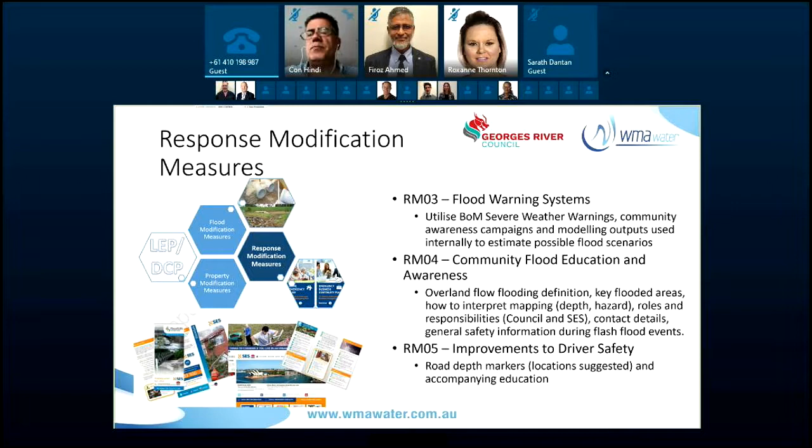Okay, so the final type of measures that we've looked at and recommended are what we call property modification. And these really relate to planning controls. So how can we change development as it occurs in the future to reduce its flood risk?

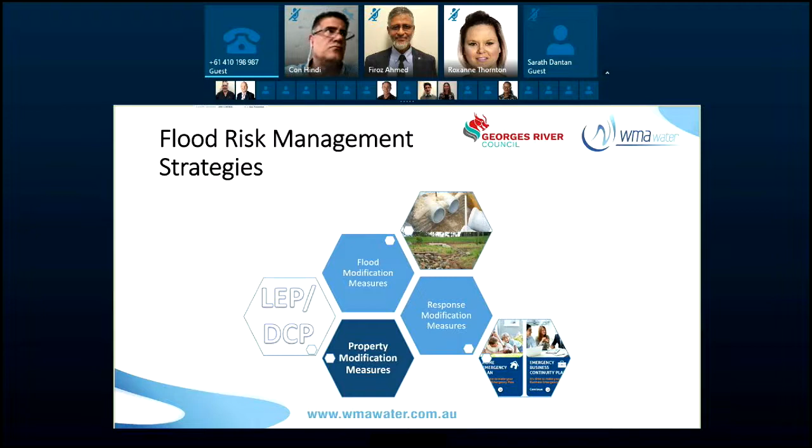And so this is done through council's stormwater management policy. In other councils, they're called development control plans. I believe council has some development control plans related to some other topic areas, but the one specifically related to flooding is called the stormwater management policy. And so a lot of this already exists within the stormwater management policy.

So the recommendations are really about using the outputs of the study in collaboration with the controls that already exist. So within the current stormwater management policy, there's a recommendation for what we call a flood planning level. Now, this is the level that properties need to have their floor level at in order to

Sorry, my phone just started flashing. I didn't know what was happening.

The floor level, the level that the floor needs to be built at. And this is typically related to the 1%, and the aim of this is to reduce property damage for landholders. And so council's current document states that if you're in a low hazard area or somewhere with less than 150 mils depth of inundation, your flood planning level is the 100-year level or the 1% level plus a freeboard of 300 mils or 0.3 of a metre.

Now, the freeboard is a factor of safety applied to the flood level to make sure that that level of protection is achieved. In other areas where the flooding is a little bit more severe, council's current policy recommends the 100-year plus half a metre freeboard. Now, this 100-year plus half a metre freeboard is pretty standard across the state.

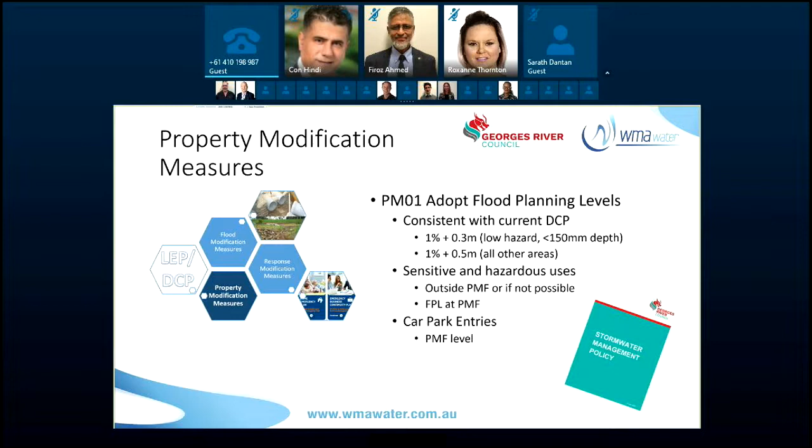There's also a control related to underground car parks. They can become incredibly dangerous during a flood event. Vehicles can float around and injure people. So the recommendation is that car park entries have the PMF level. So essentially that means that no water in any flood event can get into that underground car park.

The next one is what we call the flood planning area. So these are the properties to which those planning controls would apply. Now there's a few ways in which we can determine what the flood planning area is. I'll talk about that and these criteria that are listed here on the next slide, but I'll just mention the last one I've got here.

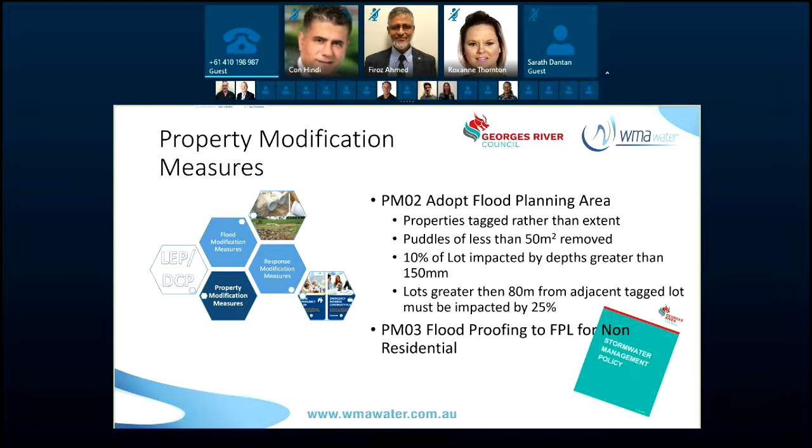There's a recommendation for non-residential buildings, so things like commercial premises, to allow what we call flood-proofing up to the flood planning level. And so what this means is that instead of having to build up the property to a higher level, the property has to be flood-proofed. And flood-proofing just means being able to have a floor material that's able to be hosed out if it's inundated, to have things like electrical points above the flood planning level. It's really just to reduce that recovery time for a business following a flood event. I'll just talk about now the flood planning area.

Like I said, we tried a few approaches. There's something that we call the traditional approach, which is very specific to places like the Georges River. Essentially what you do is you take the flood behaviour and you stretch it out until it covers an area that would represent the 100-year plus half a metre.

When we did that for this study area, which is represented here in this image, it covered a large amount of the catchment area, which, if we refer back to one of my slides very early in the piece, I talked about overland flow really not impacting a lot of properties.

So in consultation with council, we felt that this was a little bit too extreme, and I've got the numbers here. We estimate there's probably around 18,000 properties within our study area, and using these traditional approaches, we were tagging sort of 2/3 of those properties, which is not acceptable and not reasonable for the community.

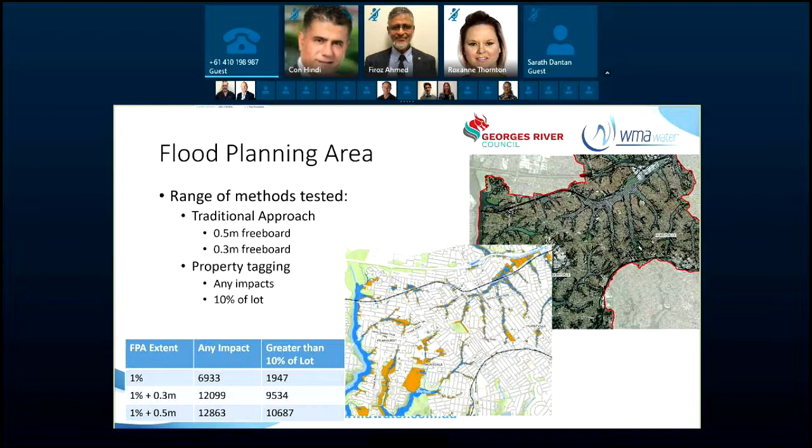So we looked at a range of other methods where we looked at a property and we checked how much of the property was inundated. So this got rid of some properties that only had a very small amount of inundation. Maybe they're located on the foreshore of one of the creek systems and only the very back of the property is inundated. So we went through a process, and the final criteria that we adopted was that any little small puddles in the flood extent less than 50 square metres were removed.

And then we tagged properties if they had more than 10% of the lot impacted by a depth greater than 150 mils. We were going to stop there, but we found that there were some scattered properties that really didn't make sense why they were added in, and so we added an additional criteria that if there wasn't another tagged property within 80 metres of that property in question, that property had to be inundated by greater than 25%. So a larger proportion of the property needed to be impacted for it to get pulled into our tagging criteria.

Now, this results in about 2,000 lots being tagged. But the point that I wanted to make here is this includes every cadastral lot in the study area. That includes things like parks and open space. We'll add to our report actually a breakdown of how many of these are residential and how many of them fall into that open space category.

But it's just slightly over 10% of all of the properties in the study area, which is pretty reasonable. And what it means for those property owners is that they can have assurances that overland flow definitely won't get into their property because they're built at that flood planning level.

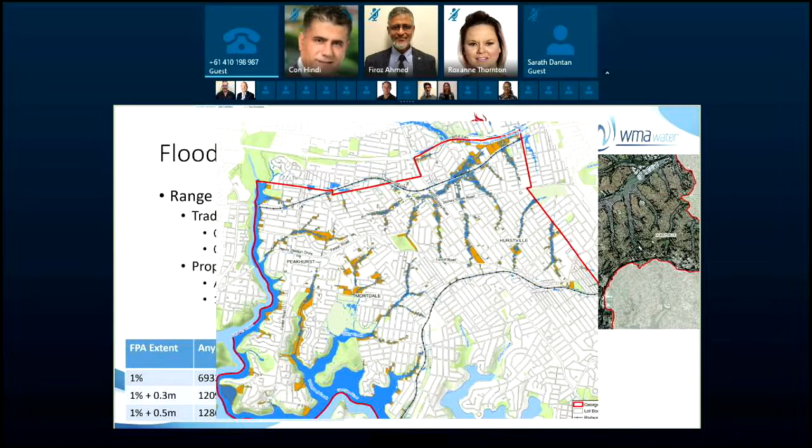I've just got to zoom in on the next slide. You can really see there's these ones up here. Sorry, I'm just looking at the wrong screen. The ones up here, but this is really the flow path coming into this larger system. And so we're pretty comfortable that we've represented the lots that may have some impact by overland flow, but that we haven't included any that aren't subject to flood risk.

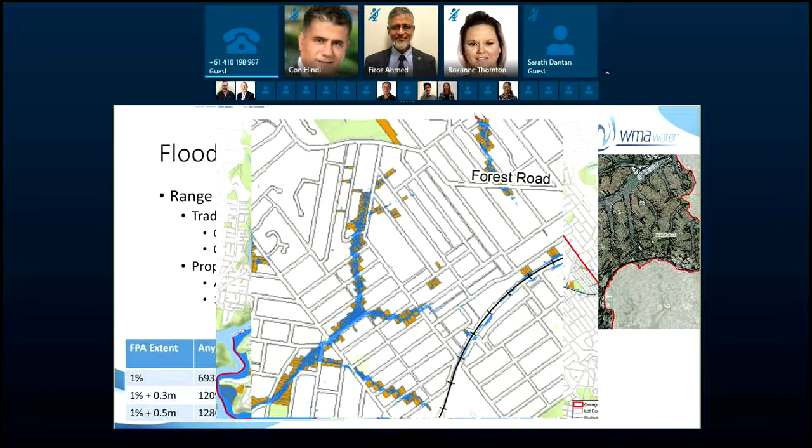The other map that I've got here: as I mentioned earlier, the Department of Planning have introduced this revised flood-prone land policy, and that requires council to also identify every property within the PMF, and that's related to sensitive and hazardous uses. So we've provided an additional map to council that identifies the properties that are within the PMF.

So we went through the same process here. We filtered the flood extent and we selected properties only if they were tagged by 10%, or 25% if they're an isolated property. So obviously it's a little bit larger area across the study area, but in terms of controls for these properties, it really just relates to whether the intended use falls into one of those sensitive or hazardous categories.

Okay, so council's stormwater management policy has really got some great controls already in place. And so what we've done is really just make some suggestions of how these controls could be improved. There are very few, but one of them relates to the terminology used. In a few locations, the event terminology is slightly different. So just for clarity for people reading these documents, it's important that that's consistent through the documents.

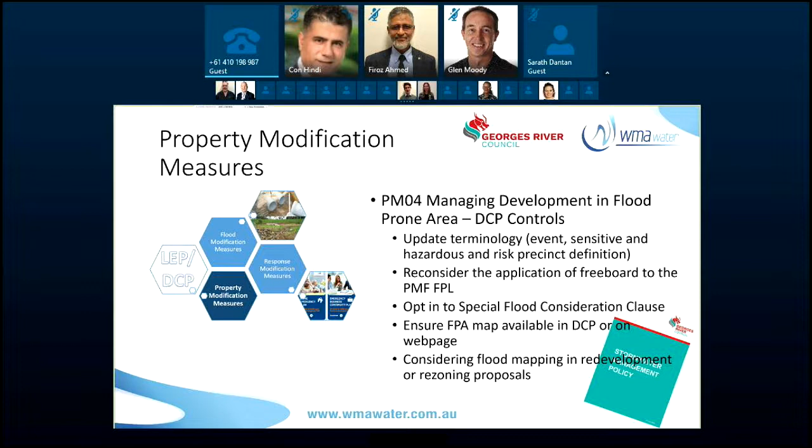Thanks, Erin. These are discussed in more detail as part of the report. So if you have any questions, I'm happy to take questions via email on the recommendations for the planning policies.

So the final stage of the floodplain management plan is to develop this strategy for the community. And one of the key points is that the community has been given opportunity to give feedback on the plan. So the idea is that the report will go on exhibition for a minimum of 28 days to gather that feedback from the community and other stakeholders.

Given we're in sort of an unknown COVID situation at the moment, Council and WMA Water have worked through these strategies together to advertise that the study is available for the community to read and give feedback on via the local newspaper, include some information about the study on the webpage and social media platforms. We'll be recording a video where the community can listen to the key recommendations, obviously not in as much detail as we've gone into today. There'll be a video and also some frequently asked questions.

We're also going to provide the opportunity for community members to book and have a video conference with council staff as well as WMA Water representatives. And council also plans to formally notify all the properties that are tagged within the flood planning area of that tagging.

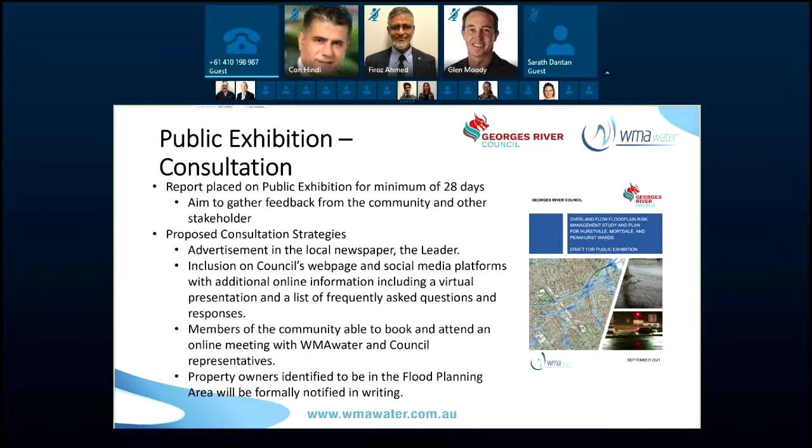So where to from here? The documents ideally will go on public exhibition. We'll receive and address any submissions. Sometimes this will mean that we look at additional options, or we maybe change some of the recommendations. We want to know what the community and the other stakeholders think. It's not just a process. We really want to hear what the community thinks, so that's a very important stage. Then we'll finalise the report, and then it will be adopted by council sometime in the future. That's it, I'm done.

Thank you, Erin, for that detailed presentation. No worries. Do we have any questions? Does anyone have any questions or anything we'd like to clarify? Anybody? Okay, no one. So it must have been quite a good presentation. Yeah, just excuse me, Councillor. I got a couple of questions for Erin. Please go ahead. If you just check on the chat, Erin. I can't see the chat because I'm sharing my screen. Okay, we've got plenty on the chat here. Would you like me to read out the questions, Councillor Hindi? Yes, thank you, Watson.

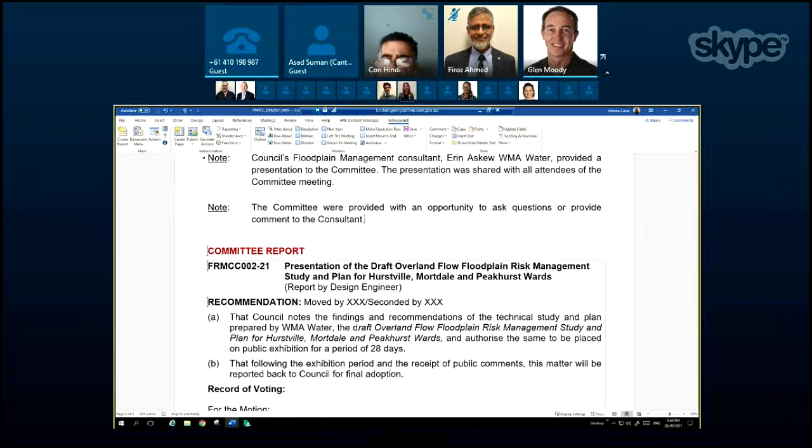Excuse me, did you compare in terms of percentage how much it was reduced compared with the 1987 ARR? Yeah, look, it's Glen here. We might need to take some of those discussions offline. As I said, we've just got a few minutes to wrap up. So if we could just move to the recommendation, that would be appreciated. Thank you, Glen. If there's any question, I'm sure you can email them and you'll get an answer. We've just got a workshop at 6 o'clock and it starts sharply at 6, so we need to be offline.

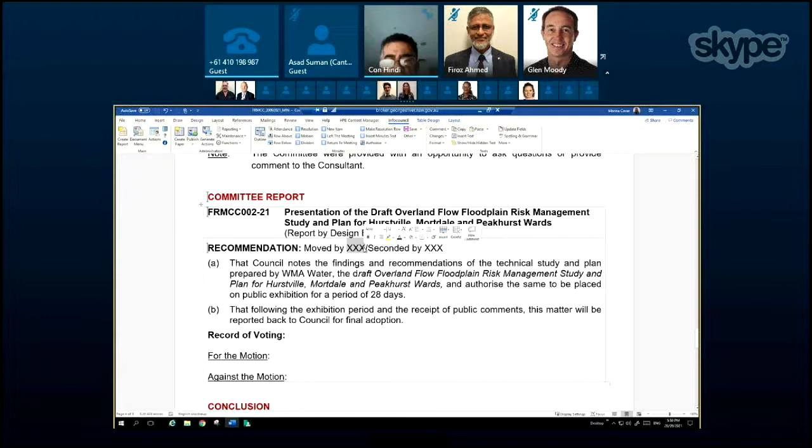Okay, thank you so much for the presentation. Can I have a mover and a seconder that we adopt the recommendation that is printed in the committee report? I'm happy to move that. Does anyone else want to second it or even move it? Happy to second it, Councillor. Yes, seconded by, is that Asad or somebody? No, Aaron. Sorry, Aaron. It's very hard to work out with you. Thank you, Aaron, that's right.

I'm happy to take my name off and put somebody else as the mover. Does somebody else want to be the mover? Yeah, I'll be happy to move the motion. If you can write down my name, Asad Suman. Yeah, that's Asad. I don't mind doing it, but as the chair, I prefer other people doing it. Thank you, that'd be great. Moved by Asad and seconded by Aaron. Is there any discussion? If there's no discussion, I'll put the motion. All in favour say aye.